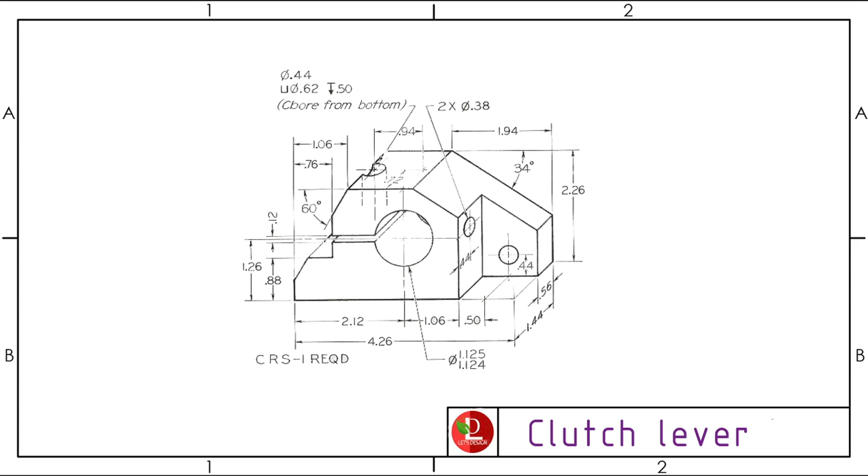In this video, let me show you how to make this exercise, also known as a clutch lever. You can see the dimensioned part here. Let's make the modeling part now.

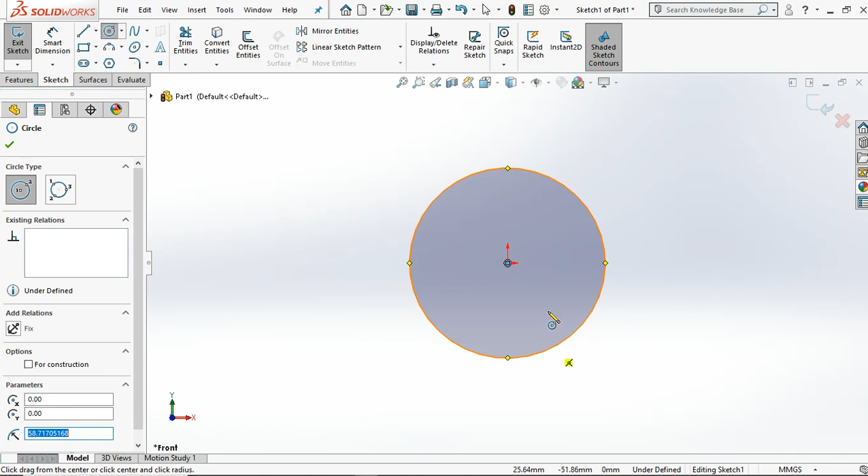From the SolidWorks interface, we can start from the front plane and then click sketch. Next, let's click the circle, starting from the origin point. Let's make it clear. Let's define its diameter value: 1.13 millimeter.

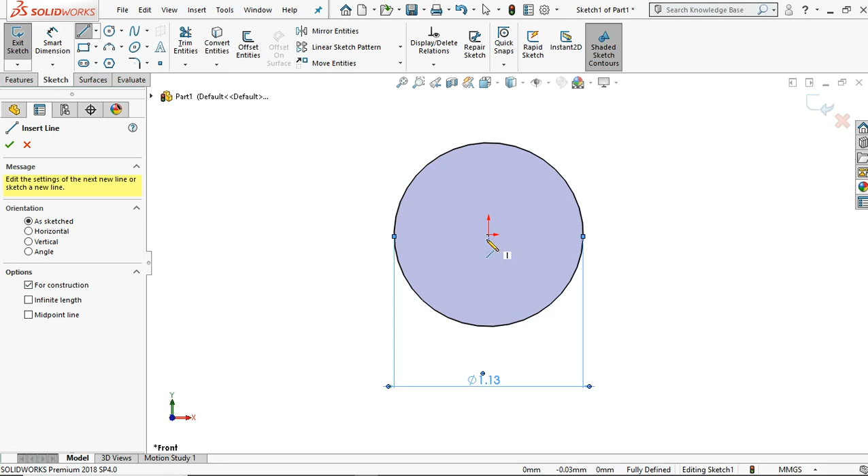Next, let's click the line and make it construction. Start from the origin point, make it vertical, and then click smart dimension and set this distance to 1.26 millimeter, and then apply.

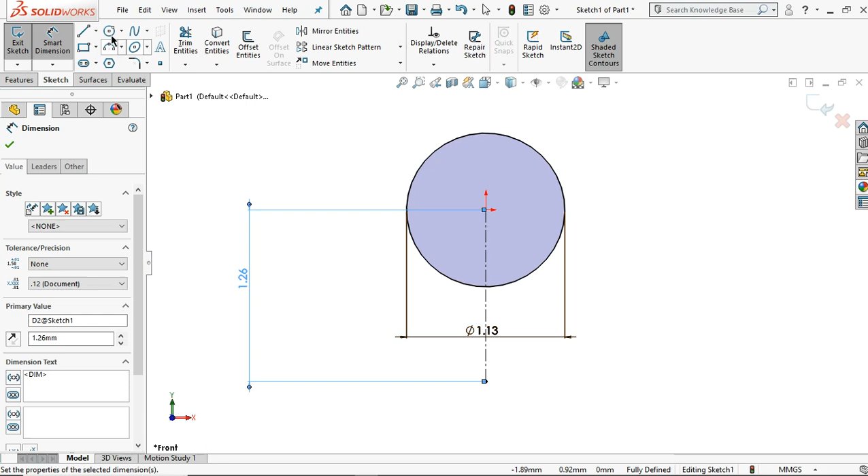Let's make a horizontal line from the left side. Click smart dimension and define 2.12 millimeter. Next, click this line, connect it from the previous one, then right click and click select. Let's define this length too: 1.06 millimeter.

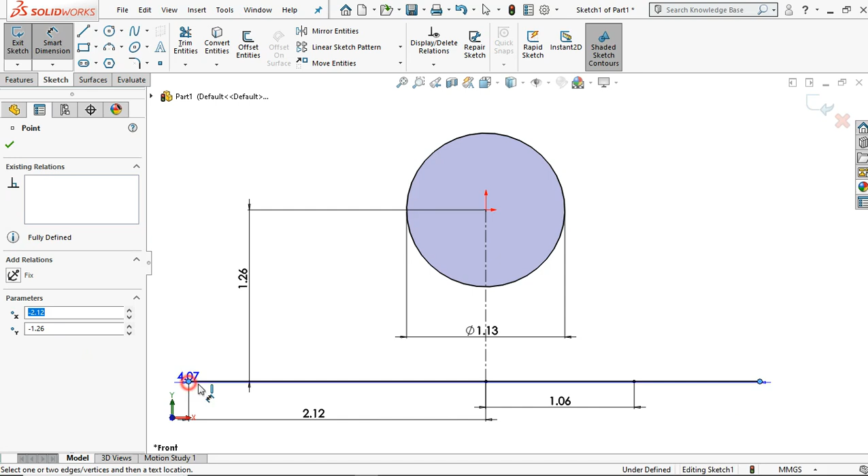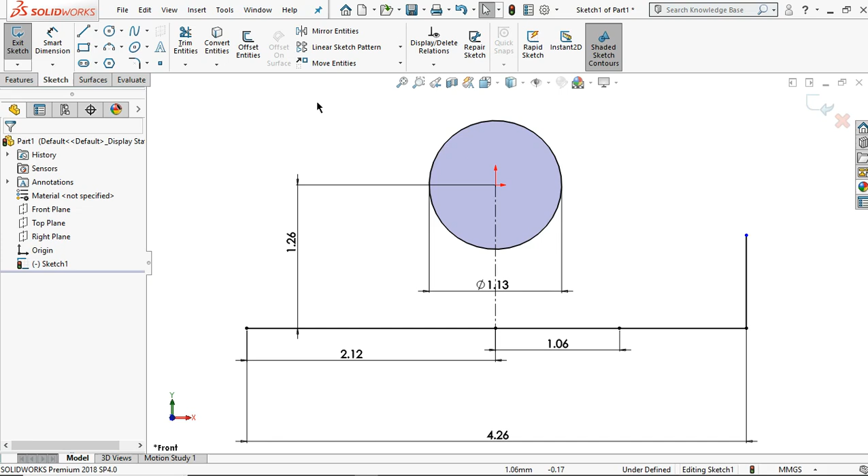For this one, from this point to this point, let's define 4.26 millimeter, and then click the line. Let's make a vertical line and click smart dimension. Let's delete the first one. Let's define the offset for this circle, then right click and click select. Next, let's define this side, make it vertical.

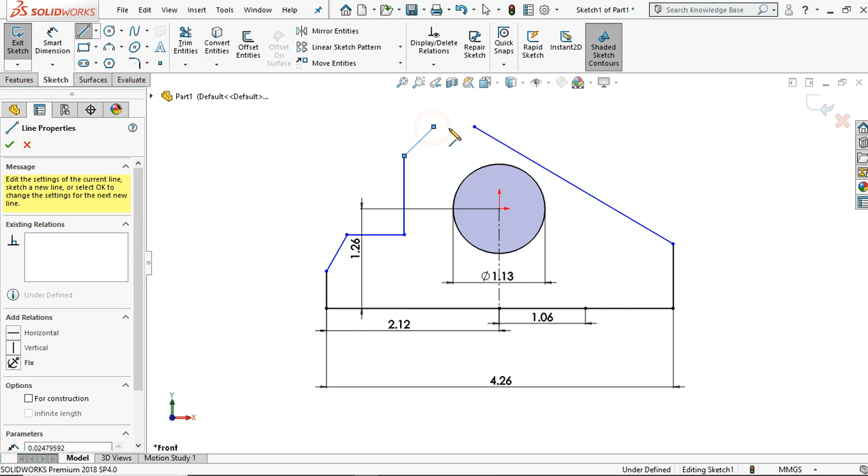Let's fully define this sketch. Click smart dimension for the first one: 0.88 millimeter. Then from this point to this point: 0.76 millimeter. And from this point to this line: 1.06 millimeter.

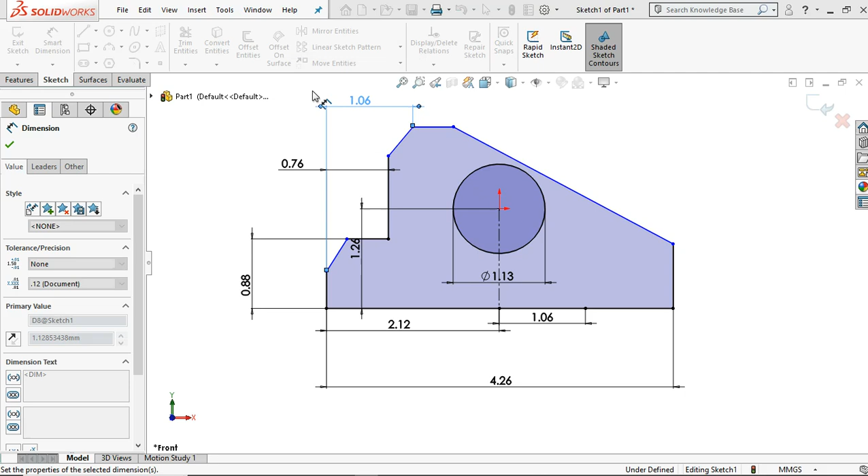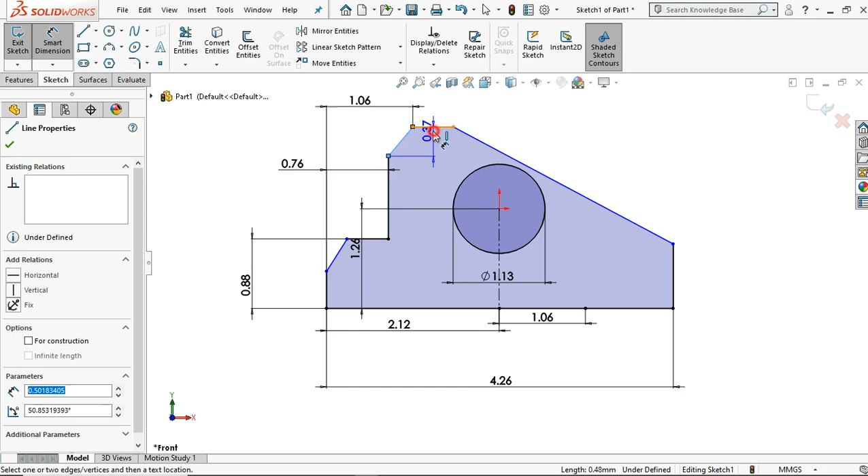Next, from this line to this line, there is a 60 degree angle. Let's press this line and click this line too, make it collinear, apply, and then click smart dimension. Let's define this height: 2.26 millimeter.

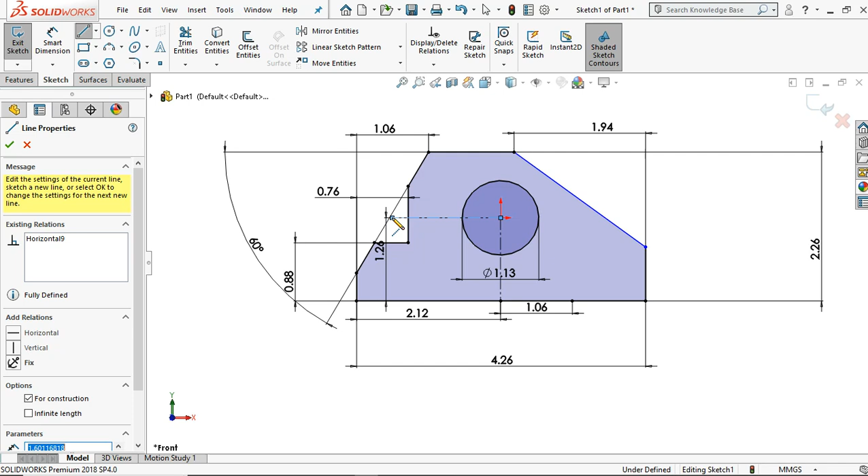Next, click this point and go to this line: 1.94 millimeter. For the next step, click this line and make it construction. Start from this point, make it horizontal. I want to cut this body, so click midpoint line. Let's start from this one.

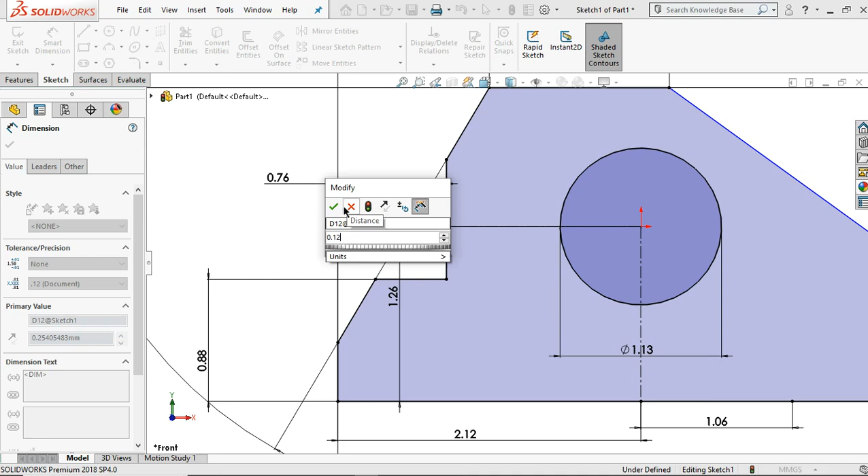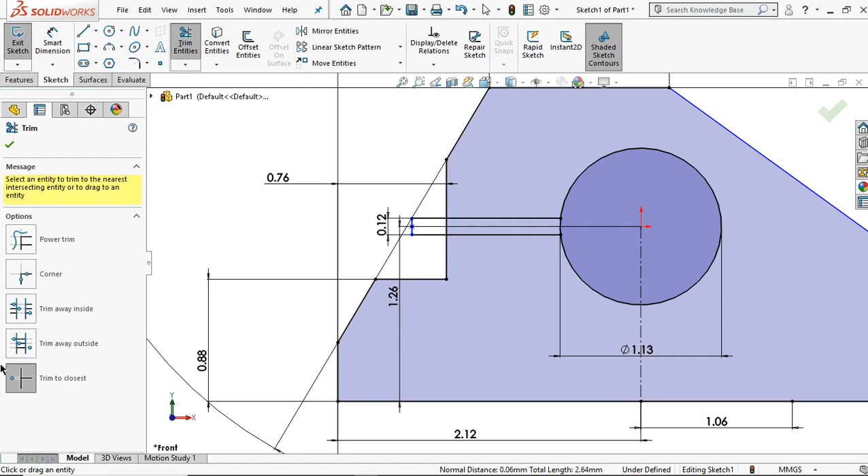Let's define its dimension for this curve: 0.12 millimeter. Then click this line, connect to the circle, right click, select, and click mirror entities. For entities to mirror, click this line; mirror about, click the guideline, then apply. Delete the unnecessary lines with trim entities, making sure trim to closest is selected, then click the line.

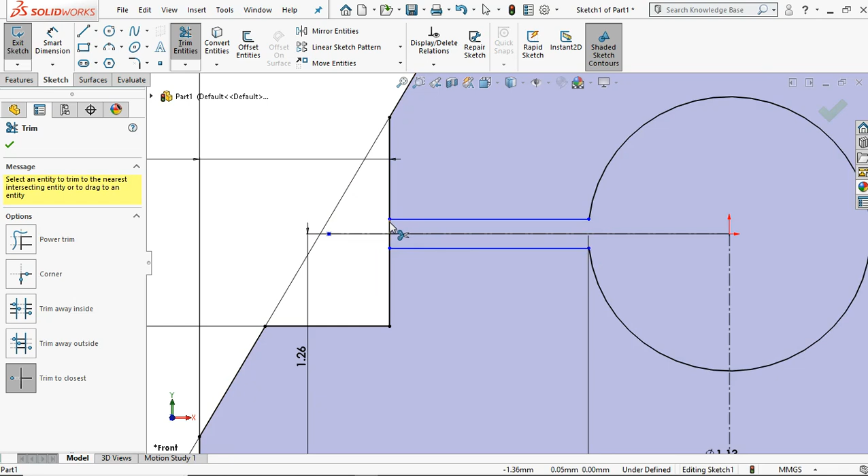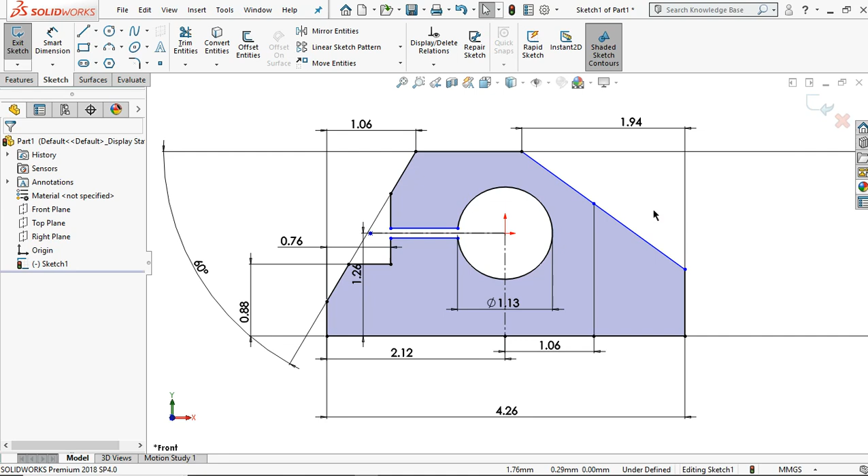Next, I want to define a circle in this area. Click this line and connect to this line, right click, then select. Then I make a circle. Click smart dimension, set its diameter to 0.38 millimeter, and define its location with a distance of 0.5 millimeter. Then define this one too: 0.44 millimeter.

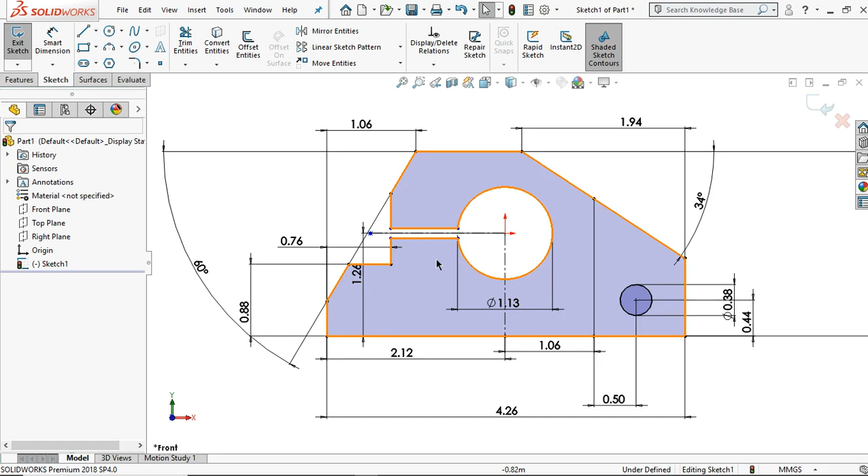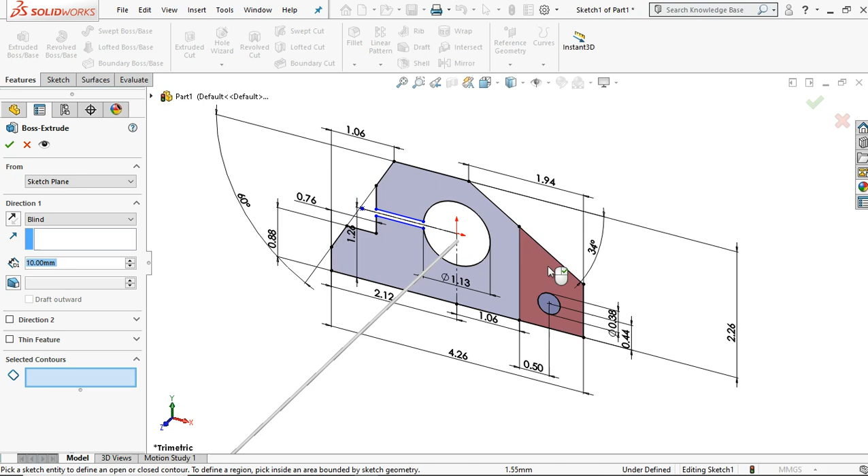Next, let's define this angle. From the detailed technical drawing I gave previously, it is 34 degree. Then let's make its thickness by clicking features, then extruded boss. Zoom in. For the first one, the thickness is 0.56 in the dialog box, then apply.

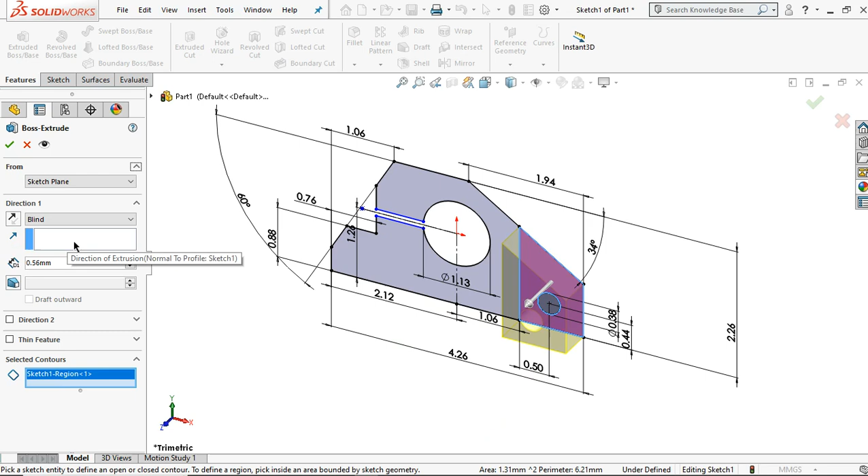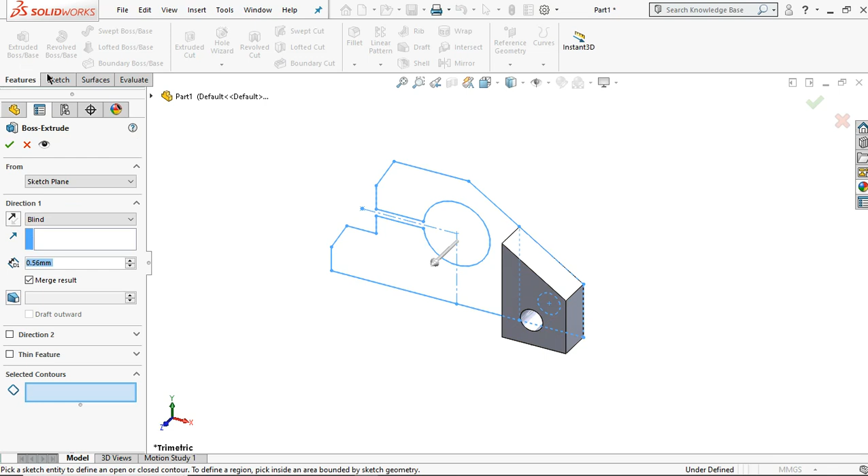Expand the sketch, click extruded boss. Click this sketch and set its thickness to 1.44 millimeter and apply.

Next, let's define holes from this surface. Look at the technical drawing: there is information for a cut from the bottom, so we will cut this body from the bottom. Click the surface, make it normal to, then click sketch.

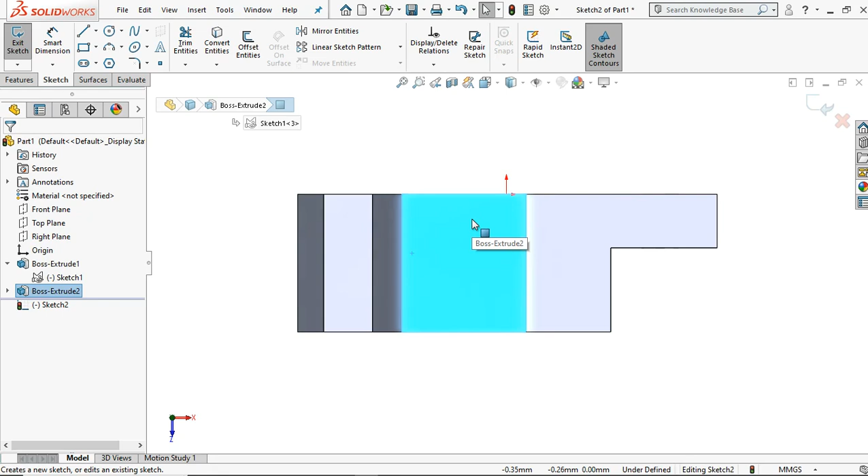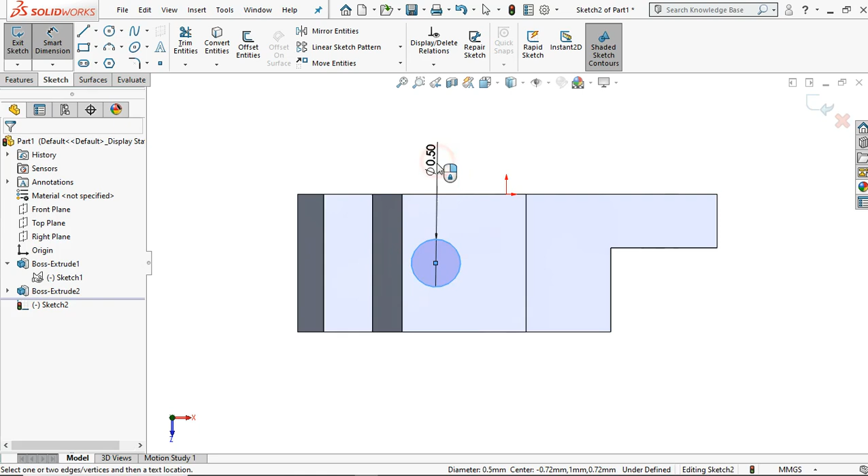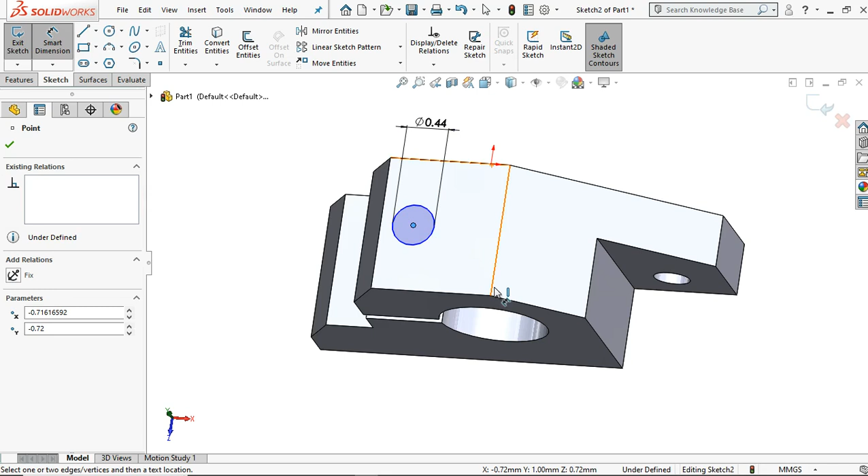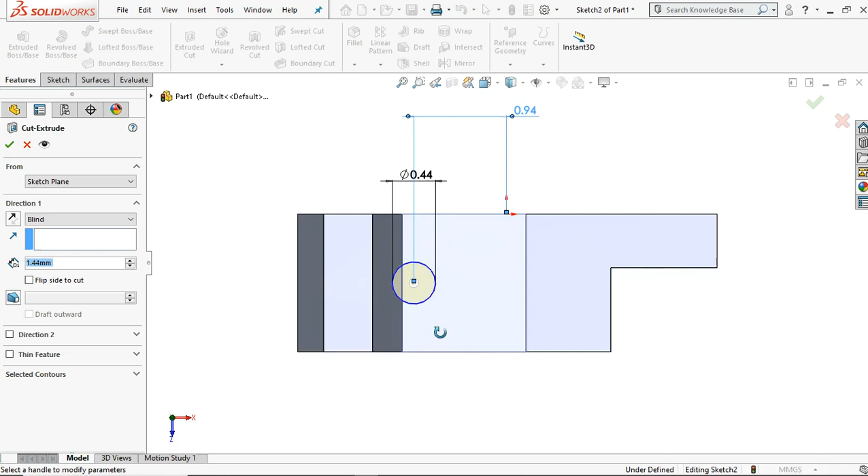Let's define 0.44. Then click smart dimension and set this. Make it normal zoom and set this point: 0.94 millimeter. Then click features, extruded cut. For direction one, select through all.

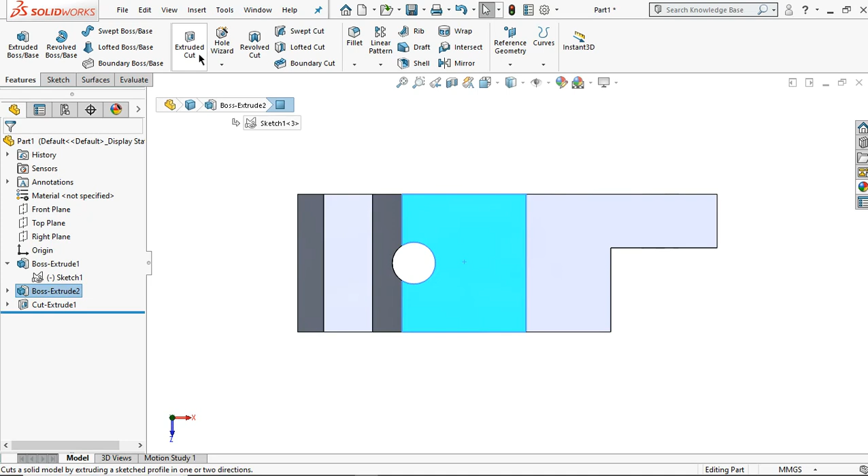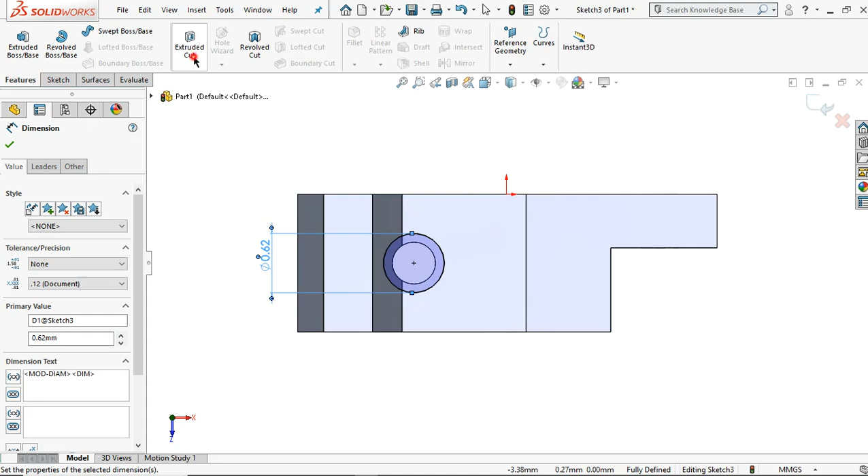Next, click this surface, make it normal to. Let's make the bigger one. Click circle from the center: 0.62 millimeter, then features, extruded cut. Define its depth to 0.5 millimeter.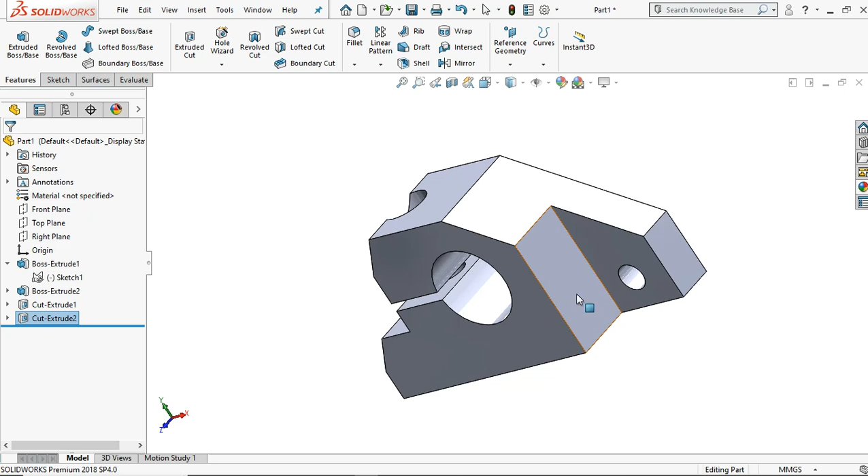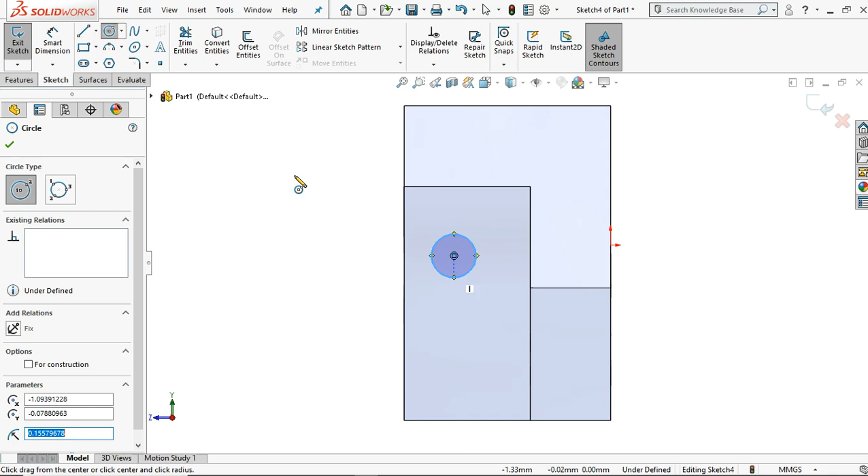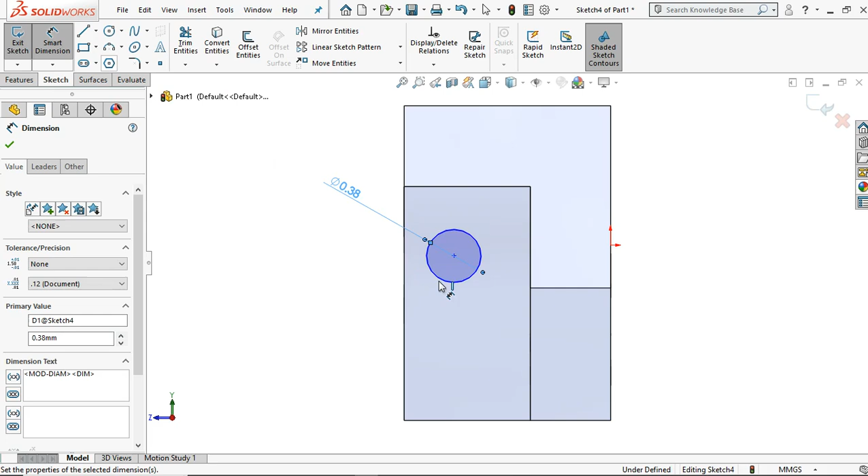There is modeling left for this surface. Click this surface, then normal to, then sketch. Click circle and define the diameter: 0.38 millimeter. Set its location from this side: 0.44.

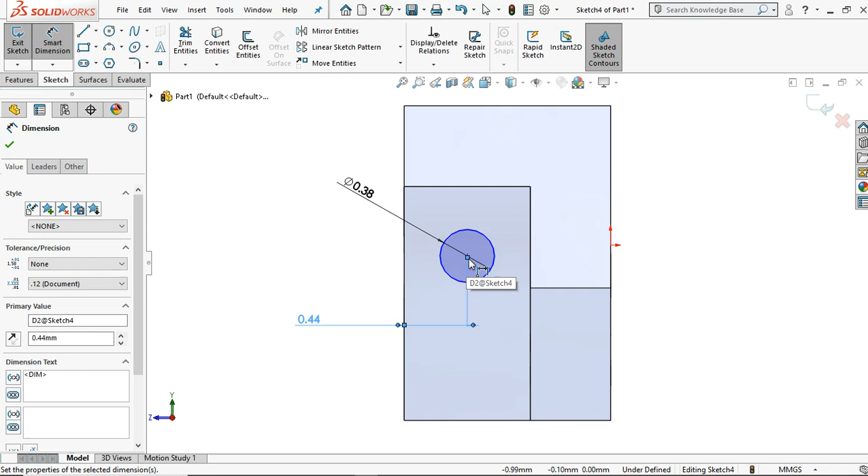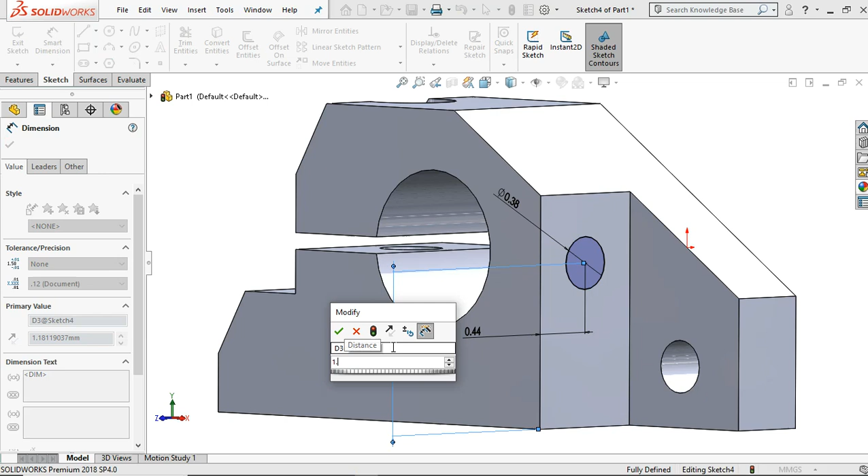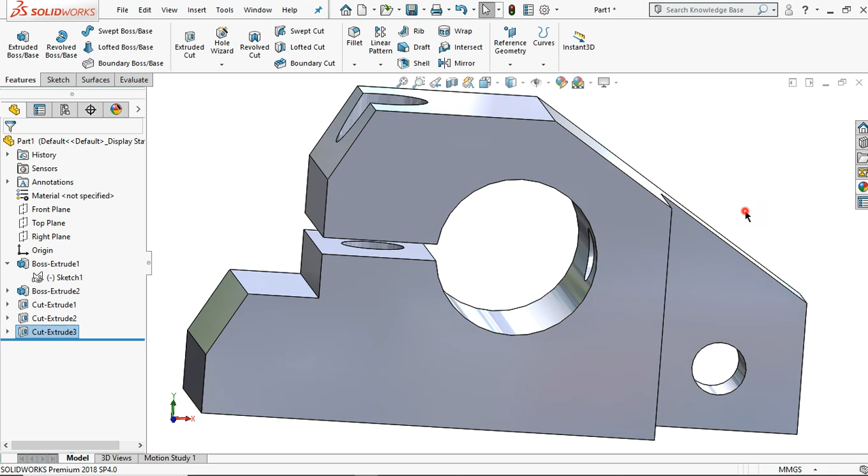From this one to this circle, same center: 1.26 millimeter. Features, extruded cut, select up to next. Ctrl 7 for isometric view. Finally, the part for this clutch lever is done.

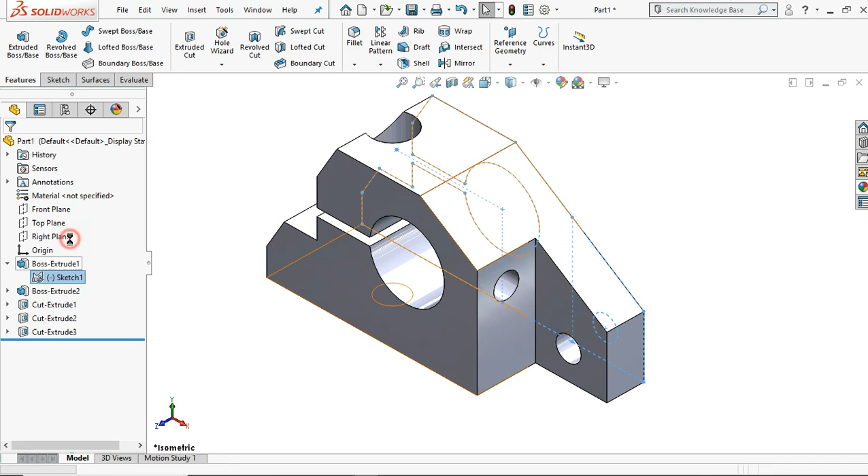I just want to share about this one. There is 0.38 times two, so these two holes have the same diameter.

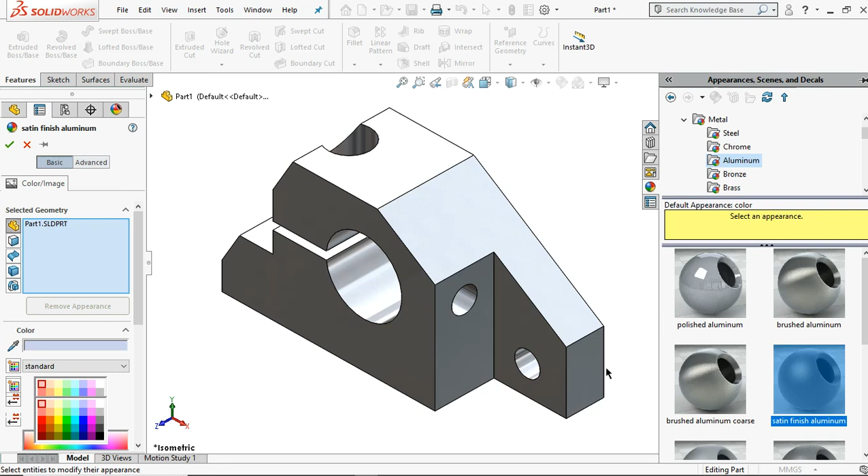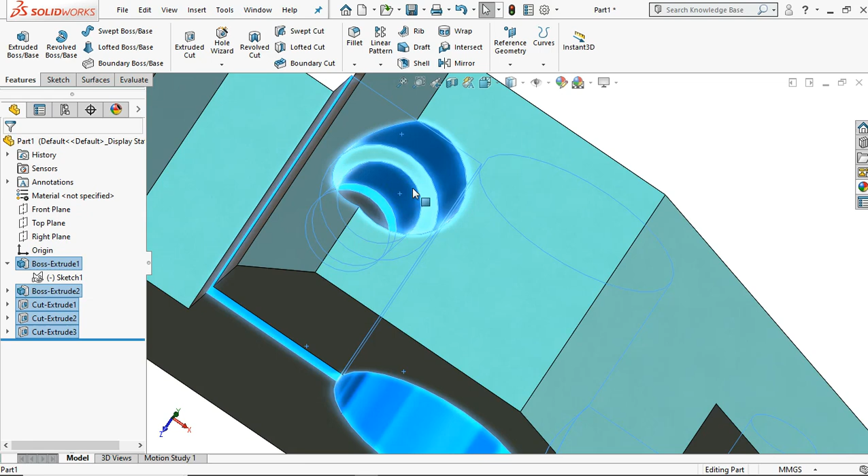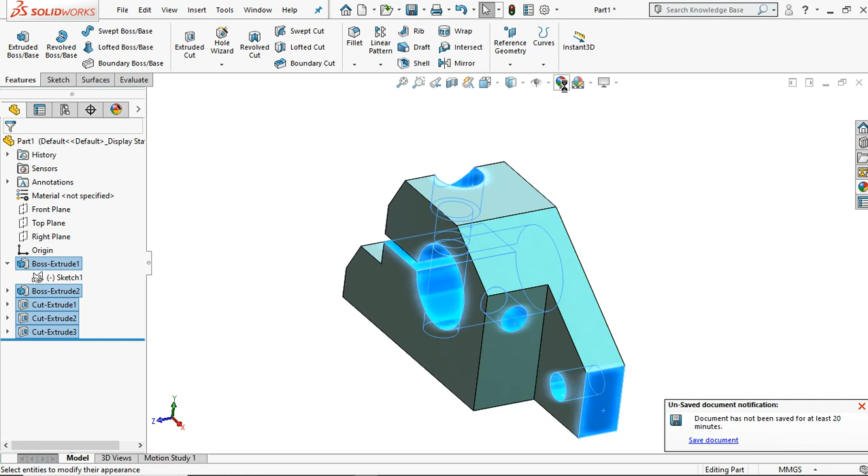Next, optionally, I want to change its color and appearance. Aluminum, satin finish, search for this color and apply, then change the surface color. Press and hold the control button, click these faces, then OK. The part is done.